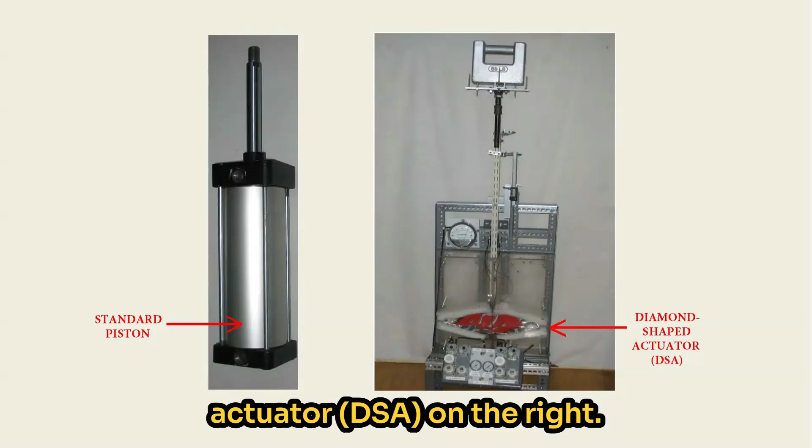This slide illustrates a conventional piston on the left and the more efficient diamond-shaped actuator, DSA, on the right. The DSA was evaluated and peer-reviewed by multiple engineer scientists and also passed by multiple international patent examiners to grant patents. The testing of the physical models indicated an efficiency advantage ranging from 15 to 17%, favoring the DSA.

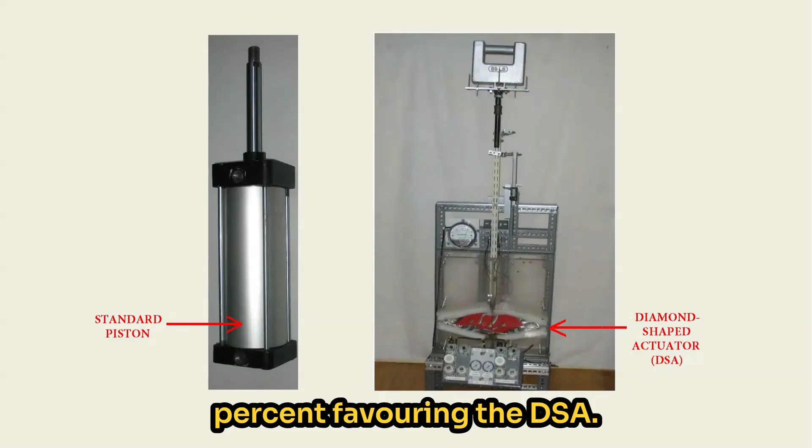Mathematical analysis conducted by an aerospace scientist from the University of Toronto concluded that in a frictionless model, the theoretical maximum advantage could be as high as 26%.

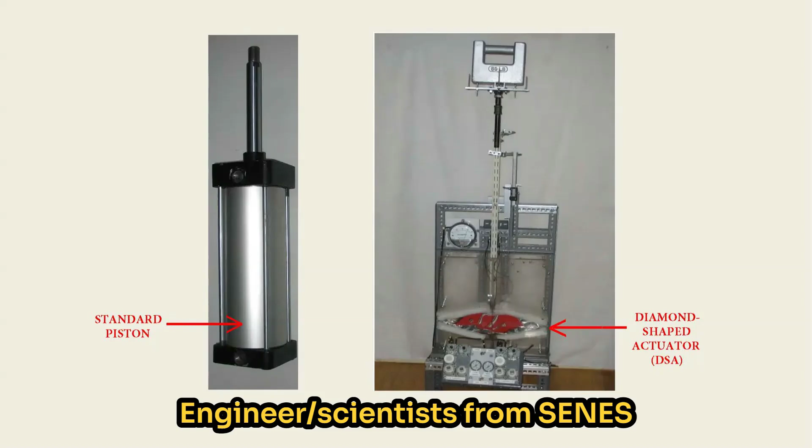Engineer scientists from SENES Consultants conducted testing both at my facility and at their laboratory and confirmed my claims obtained through their testing of the physical models.

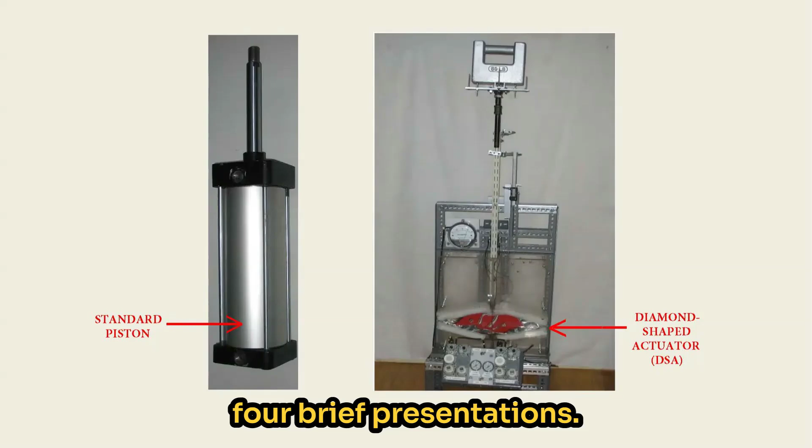This video is divided into 4 brief presentations. This is a presentation of the patents granted in Canada, the United States, and Europe. We also had the approval of the PCT examiners, the Patent Cooperation Treaty individuals, who represent the globe. It also demonstrates in this video the operation of both the conventional piston and the DSA.

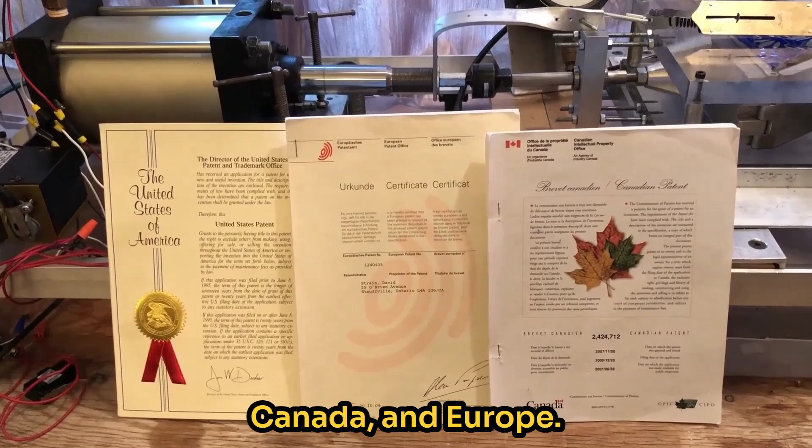The patents were granted through the US, Canada, and Europe. The basic principle of this invention is a more efficient hydraulic actuator.

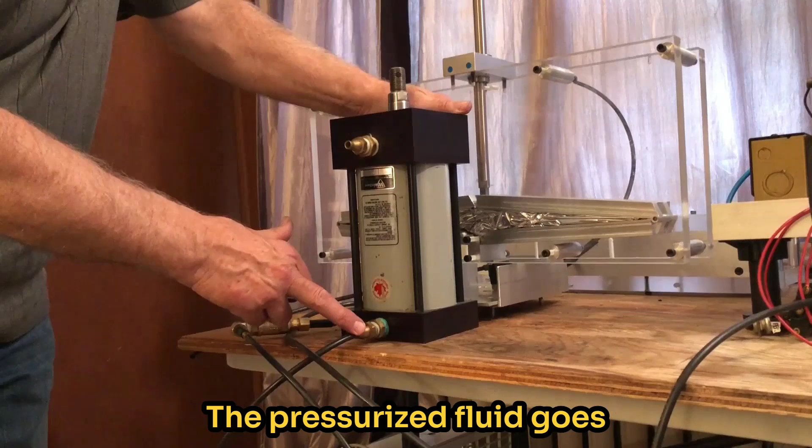In this case, it's a pneumatic actuator. It's the same thing as the fluid and the hydraulics. The pressurized fluid goes into the actuator on one side. There's what they call a boundary face there, the square inches of moving face that is connected to the shaft.

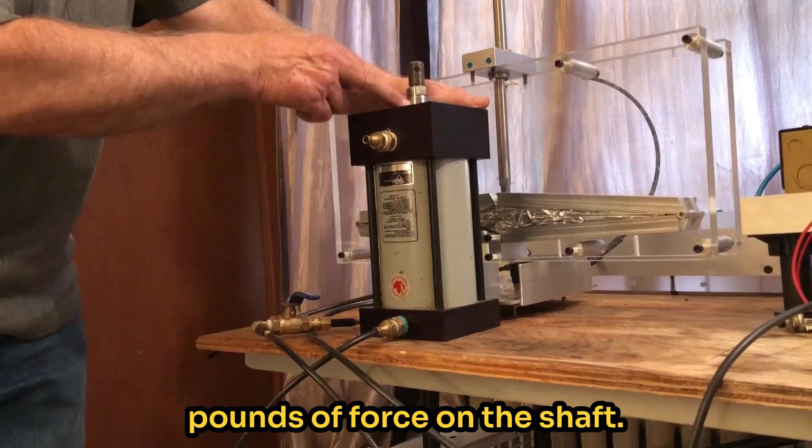So what happens if you have a pressure of 10 pounds per square inch into the actuator and a face area of 10 square inches, consequently you would have 10 times 10 would be 100 pounds of force on the shaft. So when I open up this valve, exposing this actuator to pressure on this side, you see the shaft coming out, driving with 100 pounds of force based on that.

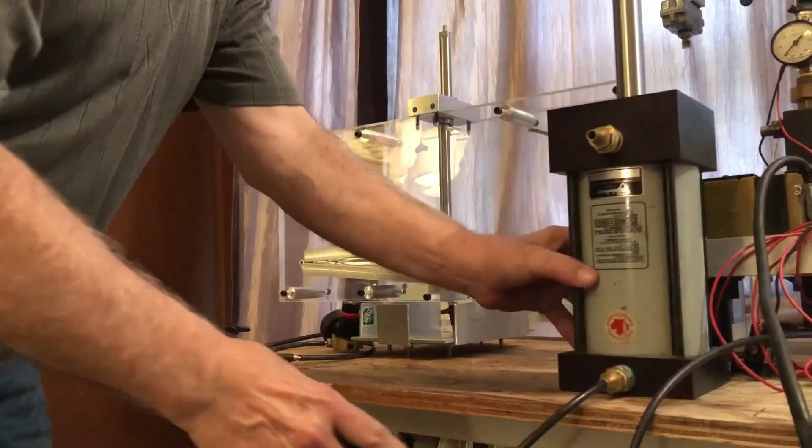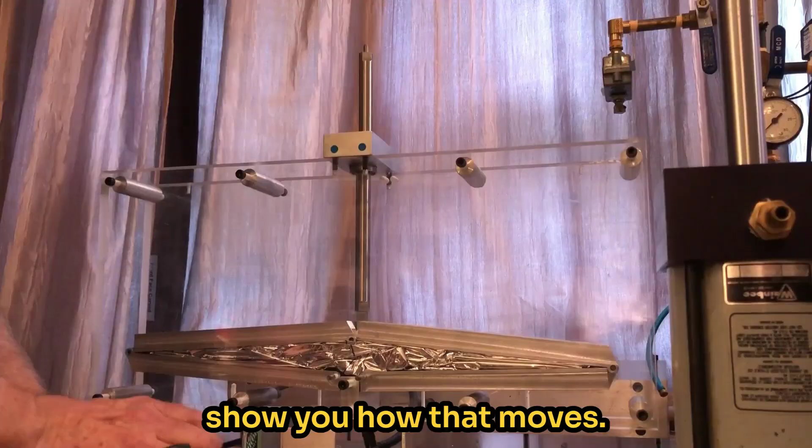The first model of the new type invention, it's a diamond-shaped actuator. So I'm going to pressurize it there, and you'll watch the action of a diamond-shaped actuator. What you see happen here is the diamond is expanding based on the pressurized fluid within the diaphragm there.

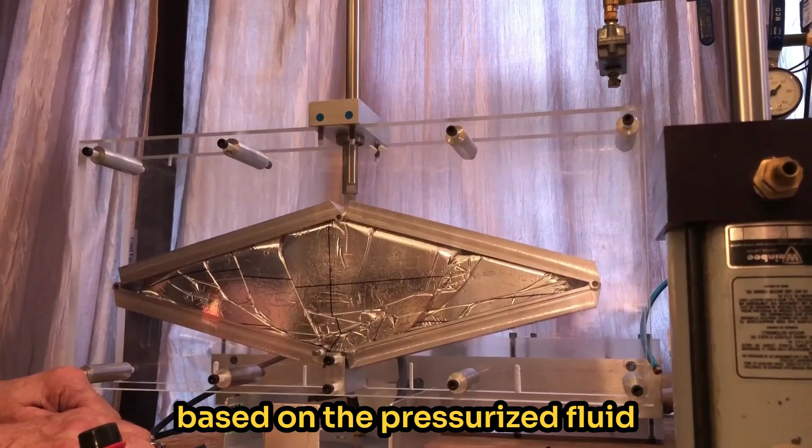It's driving forward. So what happens in this respect is that the pressure on each of the 4 faces comes together as a total force, which is on the shaft here.

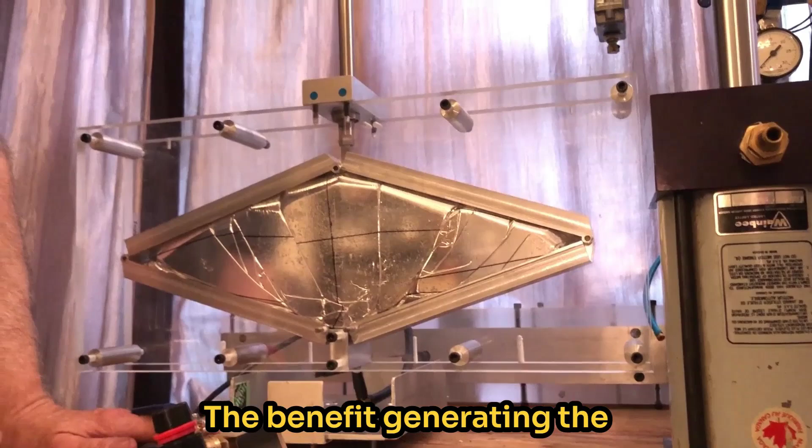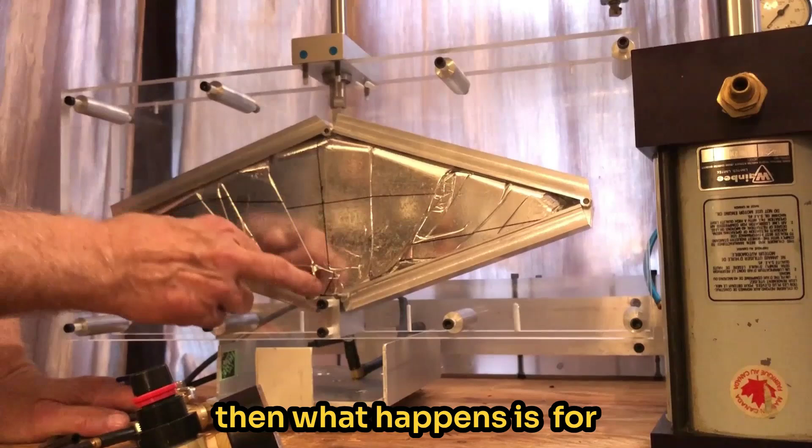The benefit generating the advantage over a conventional piston is that if each of the walls here is equal to the area of what would be in the conventional piston, then for any linear movement in this direction, there'd be less of a volume change within this actuator than there would be in a conventional piston.

And then the other benefit is that the total force at the tip of this exceeds the force that would be experienced with a conventional piston with the exact same fluid change.

This presentation presents 2 different formulas to explain how the diamond-shaped actuator can generate its own source of fluid by forcing it out of a conventional piston.

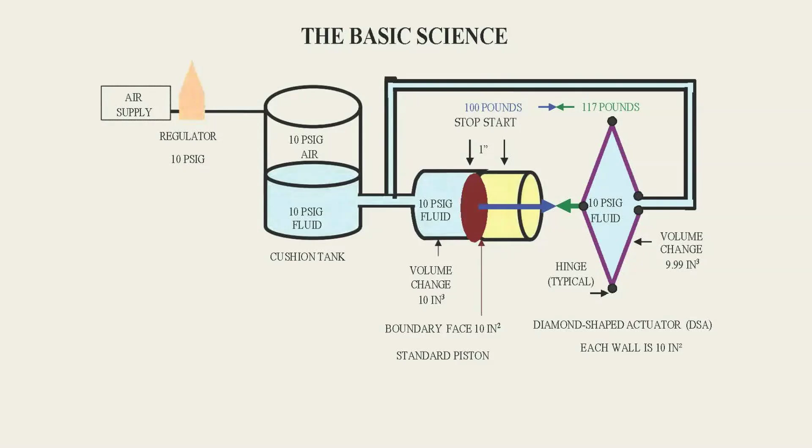An efficiency advantage of at least 17% has been shown in favor of the diamond-shaped actuator, the DSA, over a conventional cylindrical piston, as confirmed by multiple scientists.

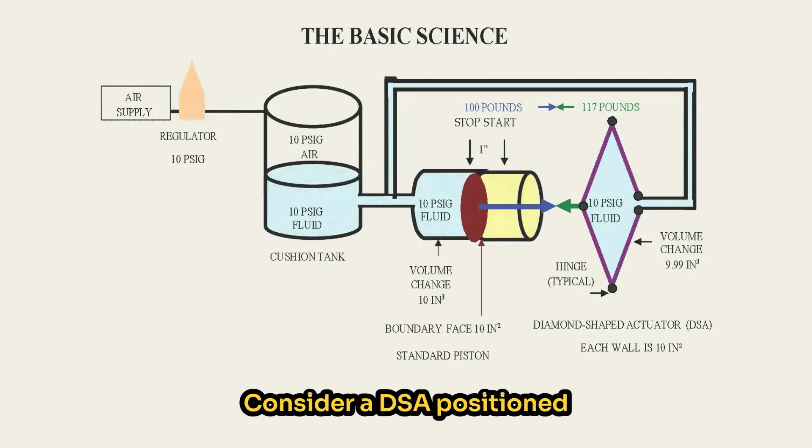Consider a DSA positioned opposite a conventional piston, as illustrated in this drawing. Both chambers pressurized to 10 psig. Under these conditions, the DSA produces 117 pounds of force, while the conventional piston produces 100 pounds of force.

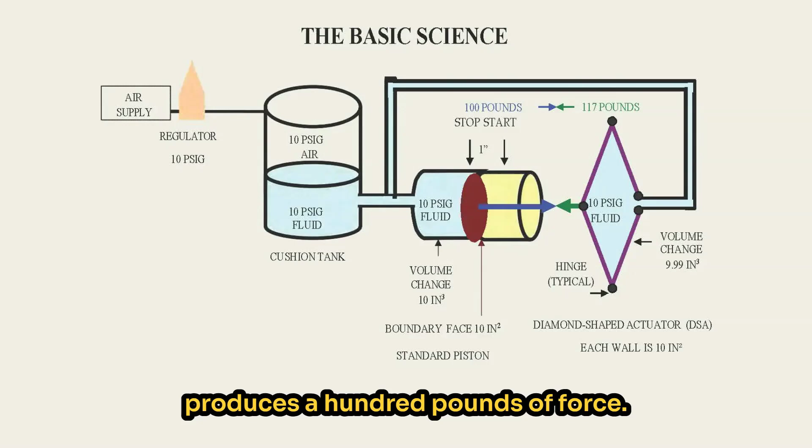As a result, the DSA overpowers the piston, forcing fluid from the piston's chamber into the DSA's chamber, while still retaining surplus displacement capacity, representing additional work potential.

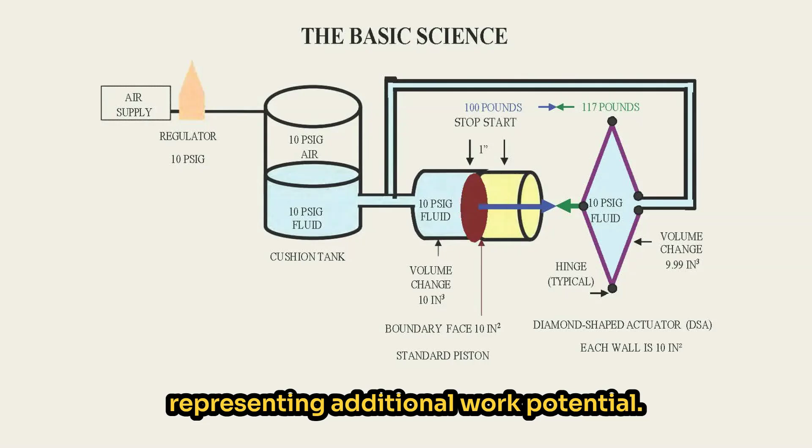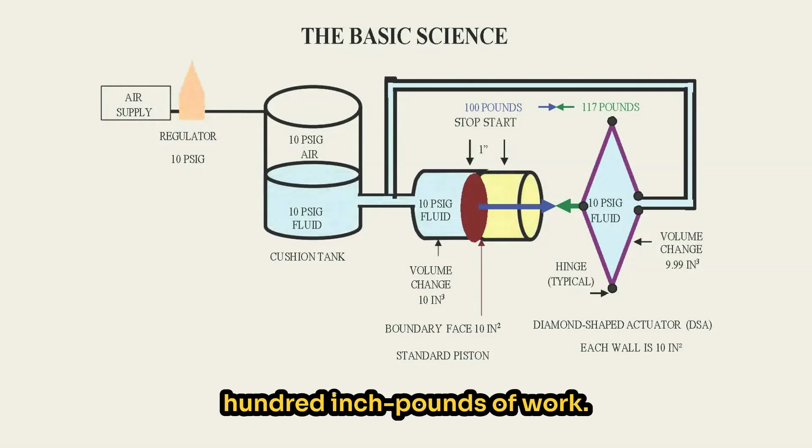To quantify this effect, we can apply the familiar relationship work equals pressure times volume change. For the piston, 10 psig times 10 cubic inches equals 100 inch-pounds of work. For the DSA, 10 psig times 9.99 cubic inches equals 99.9 inch-pounds of work.

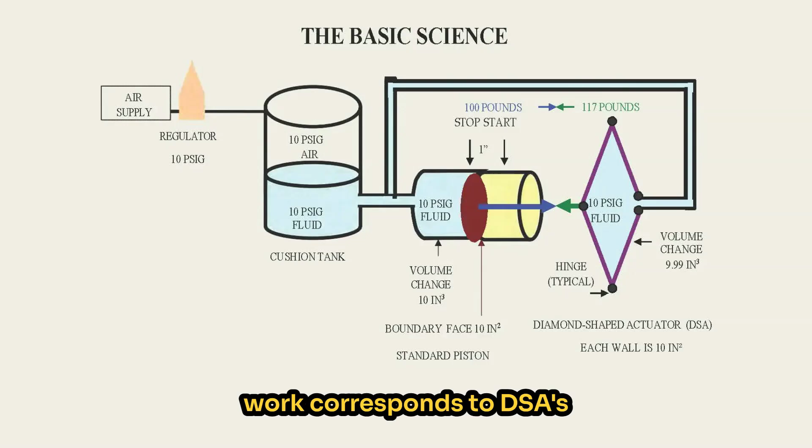In this analysis, the input work corresponds to the DSA's volume, while the output work corresponds to the piston's volume. The calculated work output exceeds the calculated work input. When the alternative work relationship is applied, work equals force times displacement.

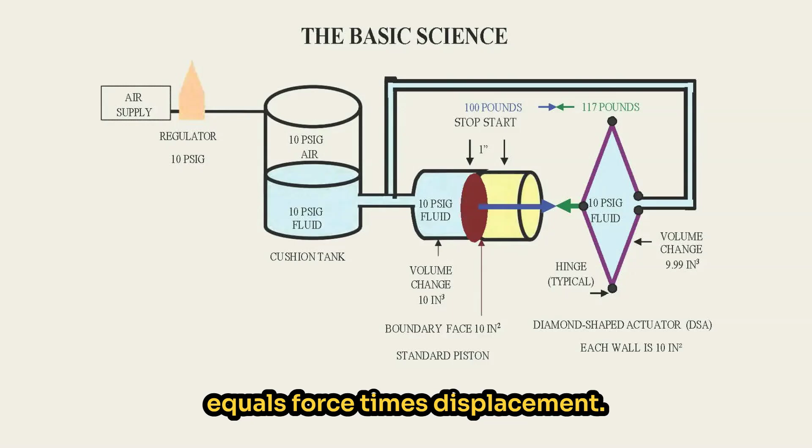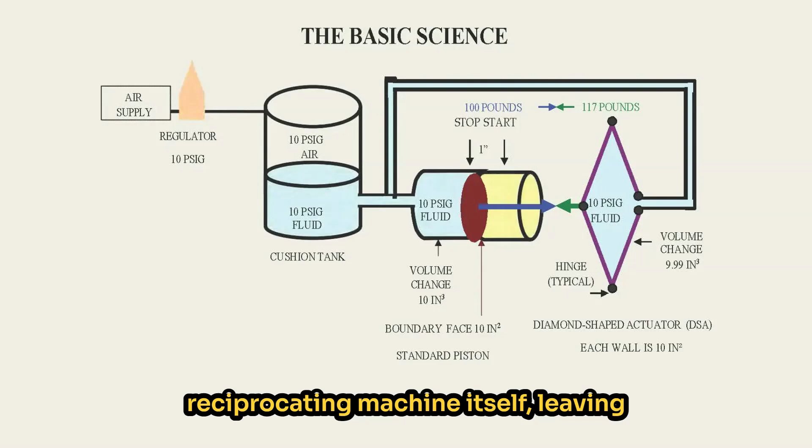The measured force differential indicates even greater surplus work potential. Based on the documented 17% efficiency advantage, less than one-third of this gain is required to operate the patented reciprocating machine itself, leaving at least 11% available for external energy production.

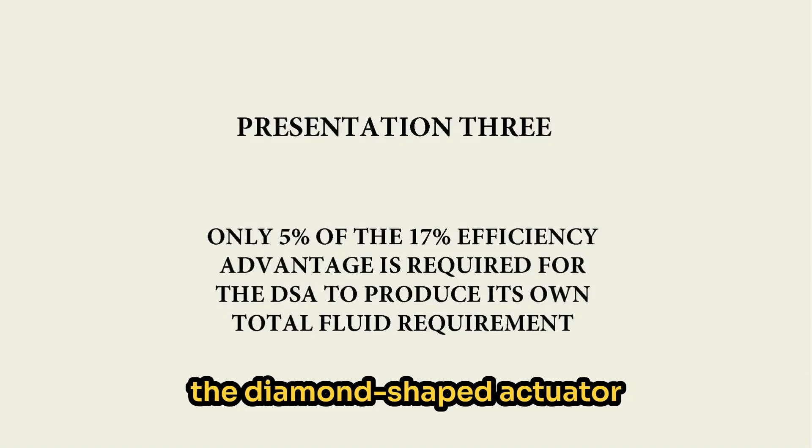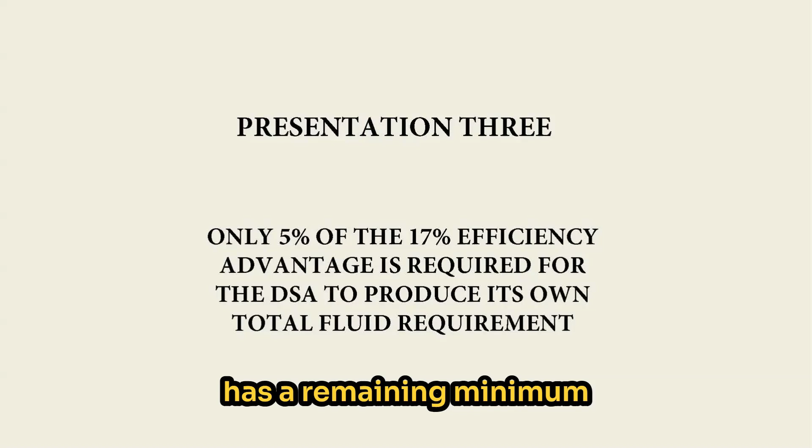This presentation provides the proof that of the 17% efficiency advantage that the diamond-shaped actuator has over a conventional piston, it only requires 5% of that differential advantage in order to produce its own fluid source. Consequently, the diamond-shaped actuator has a remaining minimum of 12% surplus work potential to achieve its ends in running the machine. This apparatus is designed to determine the counter force required on a piston shaft to expel fluid from that piston.

Based on peer-reviewed testing and analytical calculations, the diamond-shaped actuator, the DSA, demonstrates an achievable efficiency advantage of approximately 15 to 26% over a conventional cylindrical piston. The magnitude of this advantage is nonlinear due to differing geometries of the two devices.

In practical terms, when both actuators are supplied with the same fluid volume at the same pressure, the DSA is capable of producing at least 15% more useful work output than a conventional piston.

The critical question, therefore, is how much of this efficiency advantage is required to overcome the resistance of a secondary piston. More specifically, what force differential is needed to expel fluid from another piston, thereby establishing an independent fluid source while still retaining surplus work capacity.

To evaluate this condition, the pressure applied to the right-hand piston is reduced by 4.4 psi. This creates a pressure differential equivalent of approximately 6% of the available 70 psi supply pressure.

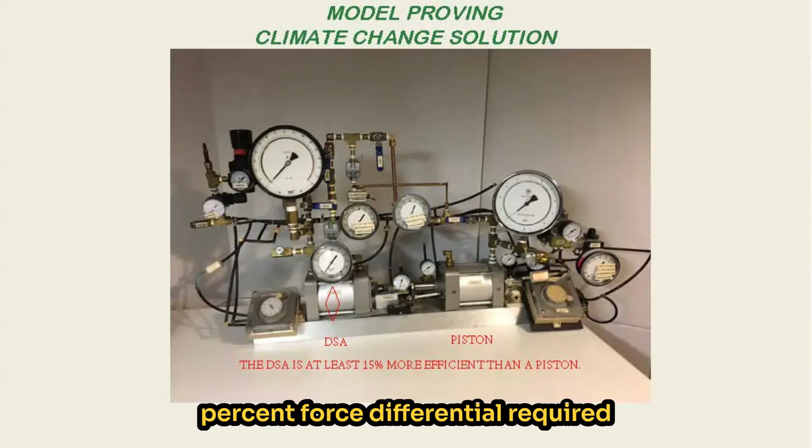Consequently, if the left-hand piston shown in red is replaced by a diamond-shaped actuator, the DSA's minimum 15% efficiency advantage would exceed the 6% force differential required to overpower the secondary piston. This would leave more than 9% net surplus work potential available after the DSA supplied its own fluid source.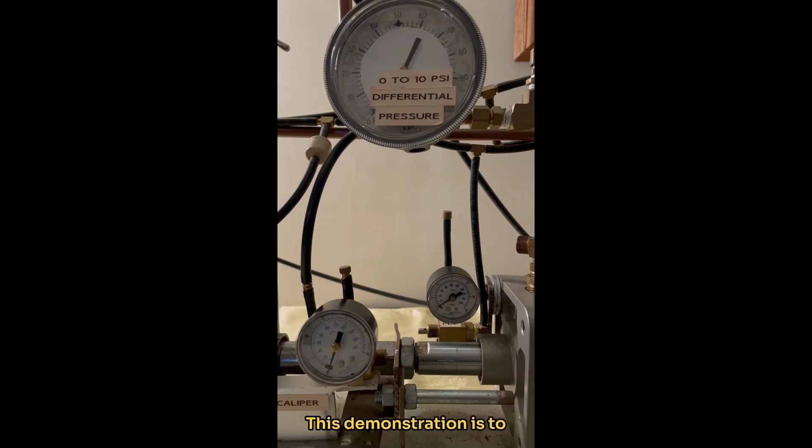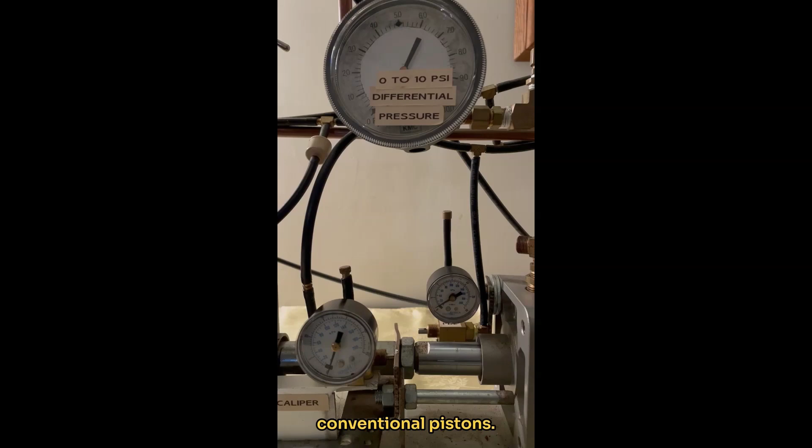This demonstration illustrates the fluid being pushed out of an actuator with the counterforce on its shaft. Now we have 70 psi to both actuators in this demonstration. They're both conventional pistons. The left-hand one we maintain at 70 psi, and on the right-hand one we're going to drop the pressure by 4.4 pounds.

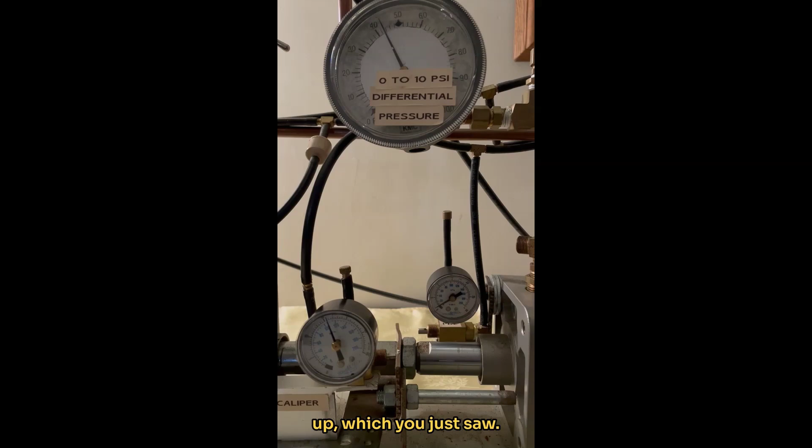You hear the controls winding a bit now, and you see the upper gauge go up to 4.4 pounds. Now watch the bottom two gauges. The left hand of the bottom two gauges will jump up, which you just saw. And if you look at the linkage, you see it is actually moving to the right toward the second actuator. So the second actuator currently is having fluid pumped out of it by the left-hand actuator.

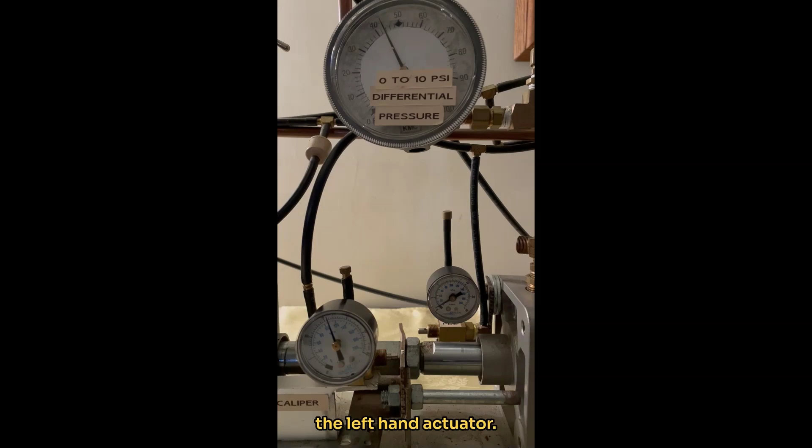Now, that percentage difference of 15% for a diamond-shaped actuator would mean that it would have available at least 10 pounds pressure differential to make our science be proven.

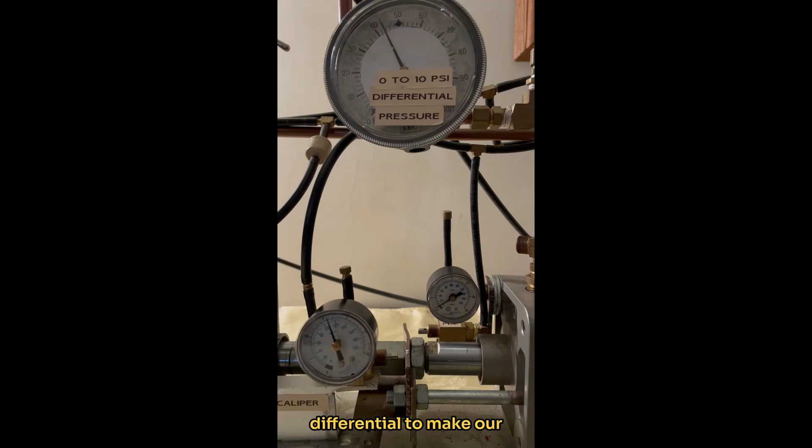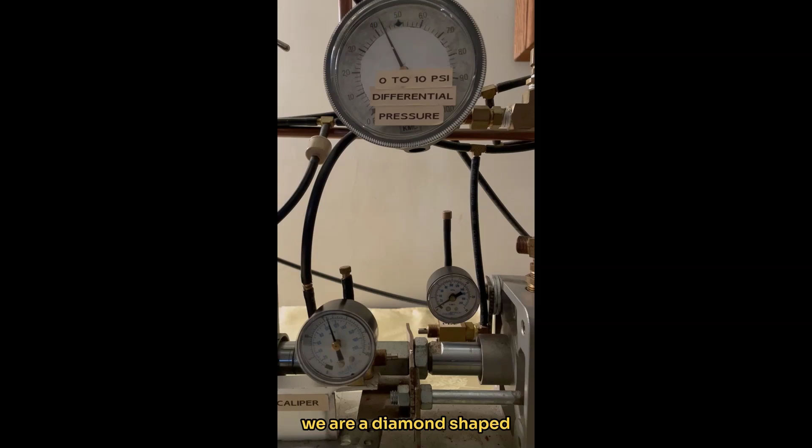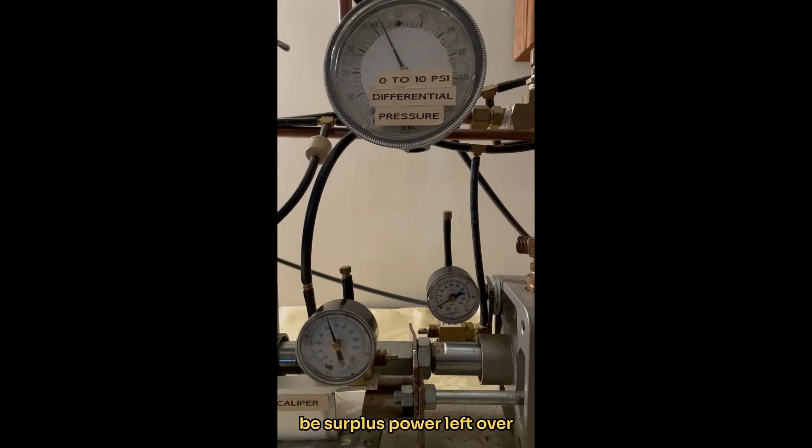We're going to use 4.4 of that 10 to demonstrate this. So we'll have 6 pounds surplus work left over were a diamond-shaped actuator riding on the left-hand piston doing the work. So we would be able to run the operation of our reciprocating machine, and also there would be surplus power left over to generate clean energy.

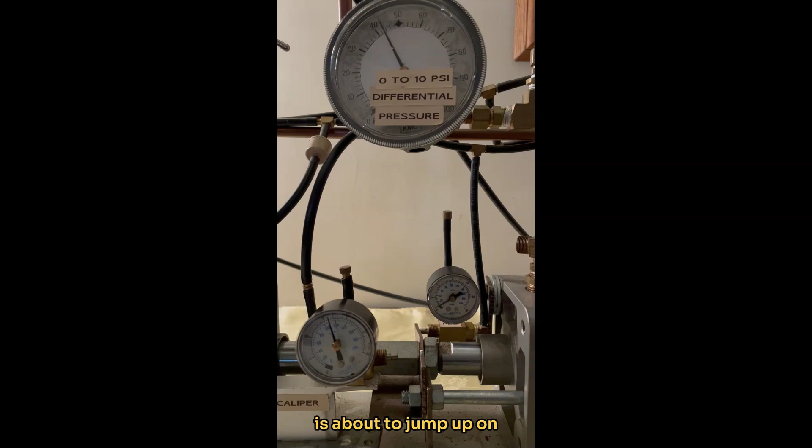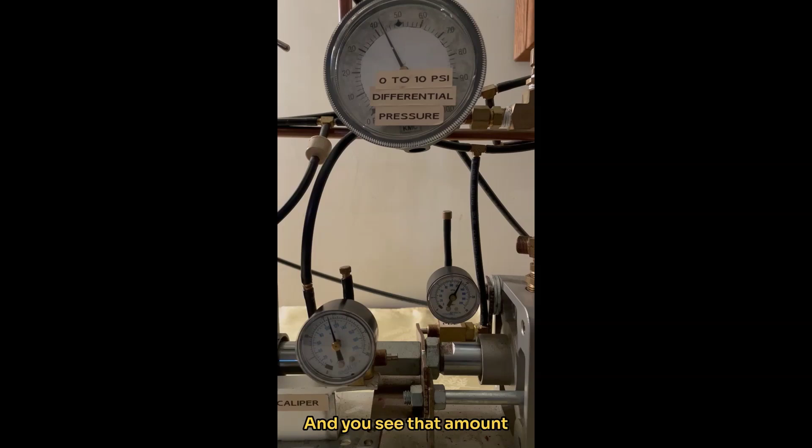Now you see the linkage is approaching the second push button, and in a minute you'll see that second push button jump up, it's almost there, and it's about to jump up on the second gauge, there it goes. So you've seen a differential of 4.3 to 4.4 pounds on that gauge cycling, and you see that amount was capable of causing the right-hand actuator to have fluid pumped to the right.